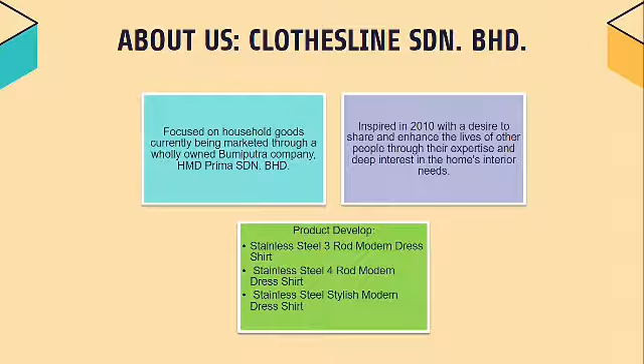About us, our company is Clothesline Sendirian Berhad. We are focused on household goods currently being marketed through a wholly owned Bumiputra company, HMD Prima Sendirian Berhad. We were inspired and our company was built up in 2010 with a desire to share and enhance the life of other people through our expertise and deep interest in home interior needs.

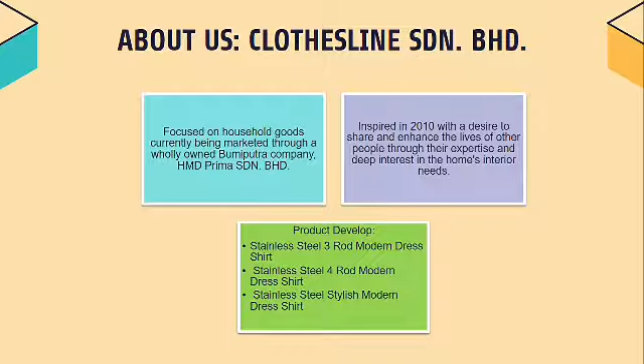We had already developed 3 products, which are a stainless steel 3-rod and 4-rod modern dress shirt rack and a stainless steel stylish modern dress shirt rack.

Our firm partner is Keyence Malaysia Sdn Berhad. Keyence is a leading provider of sensors, measurement systems, laser markers, microscopes and machine vision systems worldwide. Keyence is at the forefront of factory automation, and they strive to develop innovative and reliable products to meet the needs of their customers in every manufacturing industry.

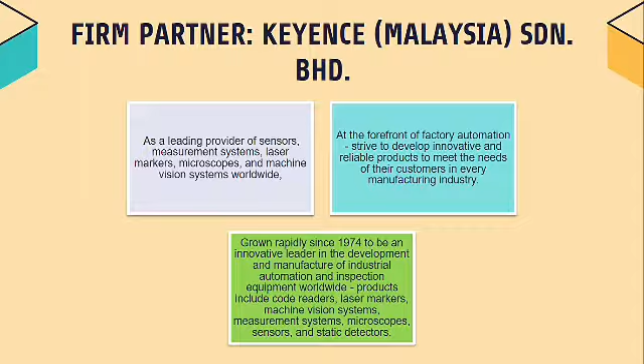Keyence had already grown rapidly since 1974 to become an innovative leader in the development and manufacture of industrial automation and inspection equipment worldwide. Their products include code readers, laser markers, machine vision systems, measurement systems, microscopes, sensors, and static detectors. Our external strategy is a joint venture.

We built a joint venture with Keyence Malaysia Sdn Berhad and became new, which is Keyence Clothesline. Why joint venture? Because the agreement is less complex and less binding. A joint venture is also useful to expand into a new market, improve our product line, and develop an edge over a competitor. Our company may have the manufacturing facilities, but the production technology required is from Keyence.

This strategic alliance between the two companies gave us access to the equipment without buying or renting it. Why Keyence Sdn Berhad?

Because of their service. Technically, Keyence trains sales engineers to have extensive product knowledge along with industry application and experience. Their service supports customers with extensive manufacturing and automation knowledge, and of course, their service includes a fast delivery system to ensure we get their product whenever we need it.

This is the basic process of R&D involved in the production of the self-activating clothesline. The first one is foster ideas. Second, focus ideas. Third, develop ideas. Fourth, prototypes and trials. Fifth is regulatory, marketing, and product development activities. And the last one is launch.

Whenever a company introduces a new product, this somehow takes roughly numerous opinions and alternative solutions into evaluation, a phase of generation of ideas often referred to as ideation. The aim of this is collective and individual attribution with innovative ideas, and perhaps chance is sometimes identified as being among the greatest performance indicators for a company.

This would be the innovative phase at which innovative knowledge is generated and business opportunities are recognized. So our R&D team carries out the brainstorming session concerning our new model during this phase. Brainstorming refers to the understanding as well as clarification of the product, then narrows down to significant and best approach opportunities for improvement and consideration analysis of existing products already on the market.

Our team conducted a market study by providing customers with survey questions to express their opinion on the current clothesline in the market. Brainstorming is indeed a productive method for evaluation that enables several or even more alternatives to a specific issue, which is that users worry their clothes get wet when they are not at home to take them in during rain.

This is the ideas of components for our product that have been discussed by our R&D team during the brainstorming session. Our firm designed and developed a self-activating clothesline for consumers using materials including a water sensor, microcontroller, electric motor, roll-out awnings, and others, with the purpose of detecting the existence of rain and protecting the clothes from rain.

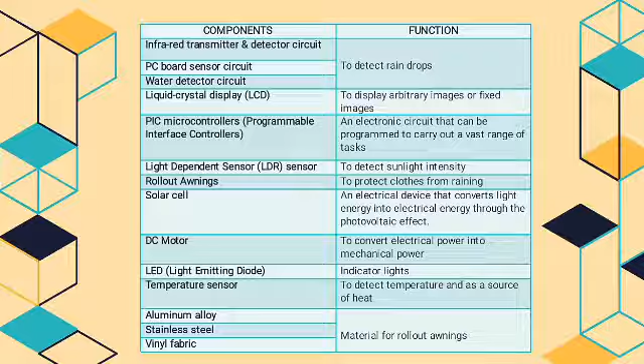The concepts will be truly discussed during focus ideas discussion. During this stage, the team could already analyze current products as well as evaluate what is unique about each revolutionary idea and how well those can be produced. It involves an evaluation process and an idea screening process.

The best option for selecting the materials, components, circuits, as well as hardware used in the self-activating clothesline process will be explained in precise terms during this phase. The requirements were selected to meet the wants and needs of consumers.

Idea screening has been attempting to take place during this stage. The ideas presented during the brainstorming process will be narrowed down through an actual assessment to evaluate whether these ideas seem to be relevant as well as valuable through further study.

The screening process starts qualitatively as well as progressively. While more data is gathered, the quantitative assessment of expected results for the item, manufacturing, industry, as well as financial aspects continues. Evaluation is also a repetitive and progressive procedure.

This is because of the need to refer back to the first screening throughout the last evaluation, unless the specification had already been modified and the assessment requirements were not extended and applied. The objective of idea screening is to acquire innovative techniques but also to remove ideas that might be failures. When ideas do not meet the requirements of the screening process, the concept should be abandoned, and the process begins again with generation of ideas.

This is the conceptual design for the self-activating clothesline. A water sensor is used to indicate the presence of rain, and the electrical potential is resolved so the signal can be transmitted to the microcontroller. The microcontroller then instructs the motor to roll the awnings in or out so the laundry is protected from rain.

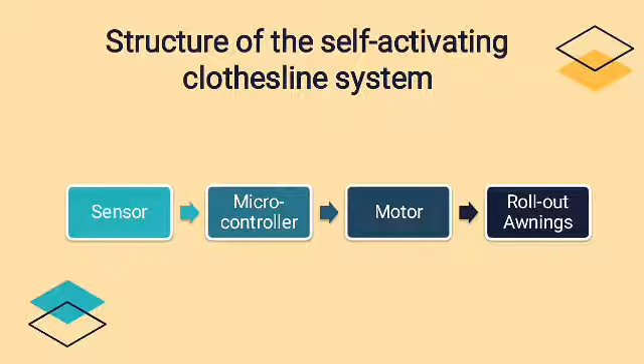During this phase, once the idea was carefully considered, it can be merged with a survey conducted to analyze overall system performance. This is the idea that is going to be developed. We chose the outdoor retractable clothes hangers because the design could work perfectly to solve the problem of protecting the clothes when rain falls.

The laundry hanger stays on a roller, carrying the lower part of the system, which rolls the awnings in and out to protect the clothes from rain. The water detector circuit was selected as the sensor to detect the presence of rain because the detector is not sensitive to sunlight.

The microcontroller control system obtains input signals from the water sensor device. The output of the microcontroller is sent to the engine control system to control the movement of the motor. The LDR is used to detect the presence of the sun, while the LCD is used to display sun or rain according to the signals from the LDR and water sensor.

A bidirectional DC motor is used since it can provide rotational movement to roll the awnings in and out in either clockwise or anti-clockwise direction. Constant rotational movement is used for rolling out the awnings to prevent clothing from getting wet.

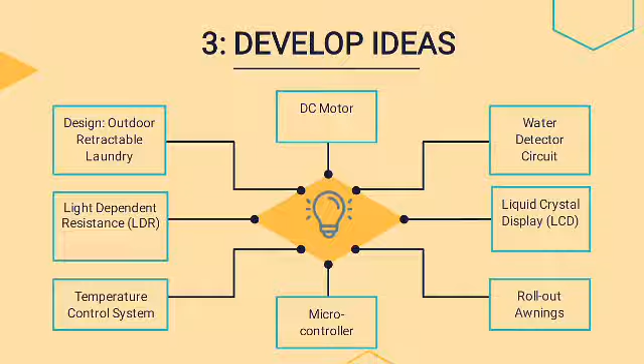It is unique because it differs from the normal clothesline. The prototype is a movable drying rack with awning and a water sensor that can detect the weather. It is organized so that all the electrical components in the control panel, such as sensor, power supply, and motor, were placed according to their layout design to successfully carry out the function effectively. It is also cost-effective, as affordable electrical components are used to prevent excessive costs if the components fail or are damaged.

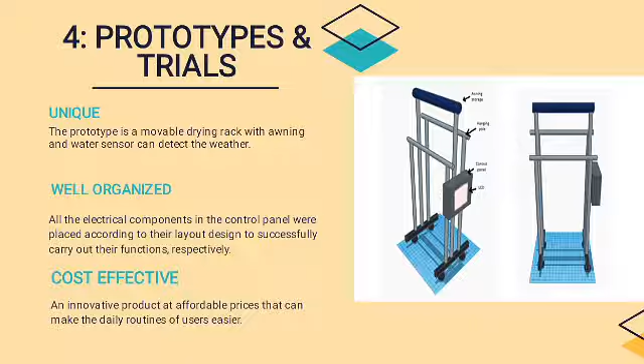It's an innovative product at affordable prices that can make the daily routines of users easier. Benefits of the self-activating clothesline: it is created to protect the clothes from getting wet due to rain. The awning will automatically roll out as the LCD screen displays rain, and the water sensor is able to detect the presence of rain.

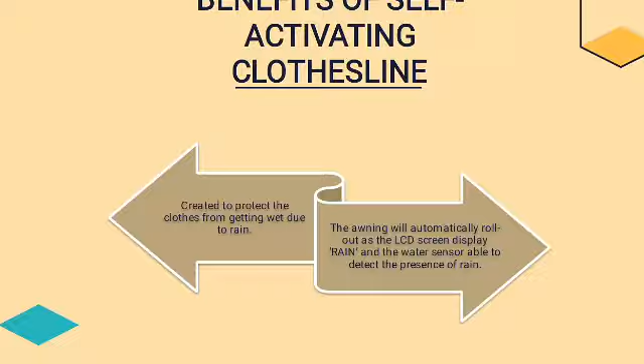For trials, the tests are suitable to run under Malaysian weather because the sun shines more in the northern part rather than in other parts of Malaysia. Some tests were made to make sure that the awning can come out successfully from the storage.

Then some more trials were run on the prototype under different rain conditions, light and heavy rain, to make sure the awning automatically spreads out within 10 seconds after the sensors in the control panel sense the rain. The LCD then shows the condition of the power supply and the surrounding temperature.

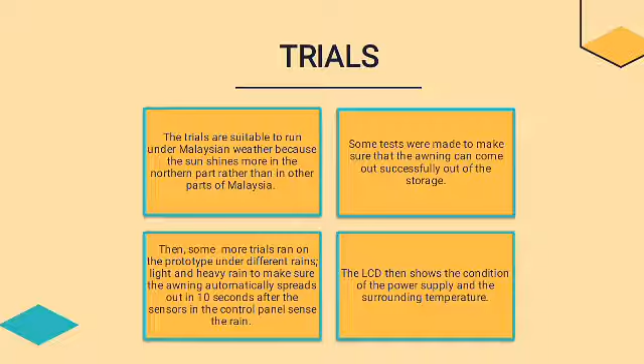Next is regulatory. Regulatory is related to control or direct by a rule, principle, or a method. In research and development, regulatory is the most important thing to make sure the process of R&D runs smoothly like a plan.

Launch. The prototypes are tested with few colors on the hanging poles, awning storage and the control panel. The team at the marketing department conducted a survey on social media about the colors, sizes and designs to identify customer preferences.

Some improvisations of a few other different versions of the hanging rack were made in terms of size, color and design, and the blueprint for each of them, and the control panel being created and sent to the manufacturers. After receiving some samples from the manufacturer, the products were run under trials in case of damage, and luckily all of them functioned well.

In conclusion, research and development in innovative product is focused on idea generating and design. Our company, Clothesline Sdn Bhd, made a joint venture with Kiin Sdn Bhd to gain sensor technology equipment. Our product, self-activating clothesline, is a grand product for a modern lifestyle habit to reduce the burden of housework.